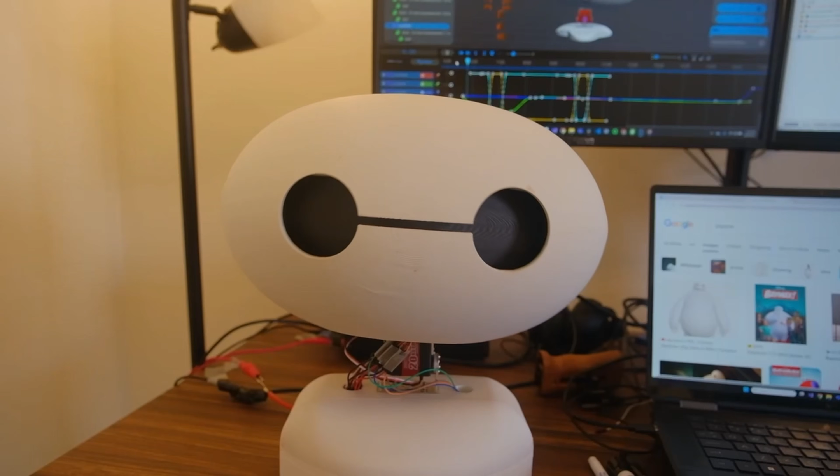Hello, I am Baymax, your personal healthcare companion. I was alerted to the need for medical attention when you said, ow.

Pretty cool, right? And this thing can already do so much more, which I'll talk about here in this first video. And my final goal for this project is to have a robot that can fully walk around and talk to people. And most importantly, give out some sick fist bumps. Ba-la-la-la. But first, let's start talking about how to actually build this thing.

There are three main parts to Baymax: the physical robot itself, the control animation to move the motors around, and the software, which basically acts as his brain. It takes all of that working together to bring Baymax to life. The really interesting and unique stuff for this robot is later in the animation and software sections. I'm saving those sections for the end because it turns out that they're kind of actually really hard to do.

Hello, I am Baymax, your personal healthcare companion.

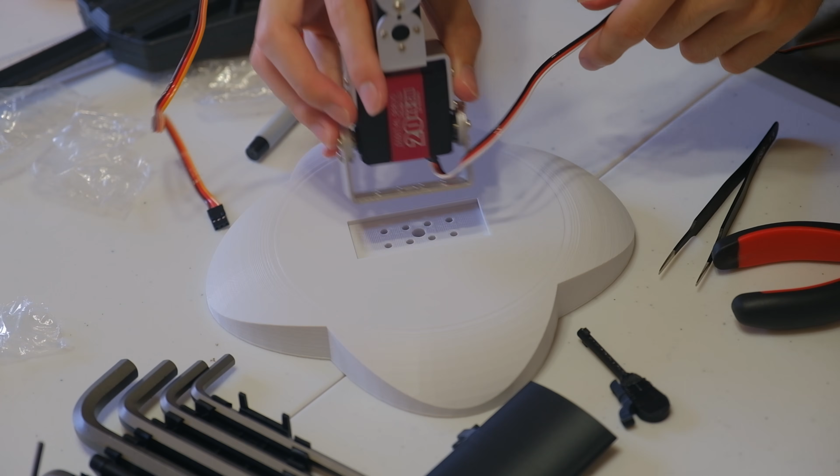I'm going to be starting with the physical robot first, because in robotics, your hardware is the foundation for everything that comes later. If I don't nail this step, everything later will always look wrong. For example, if we look inside the head at Baymax's neck, this motor moves his head in this direction. If I move that motor up even a few inches, Baymax goes from "aw, cute" to, well, you can see it. And this is the first real challenge of this project, to make my robot head match the real Baymax.

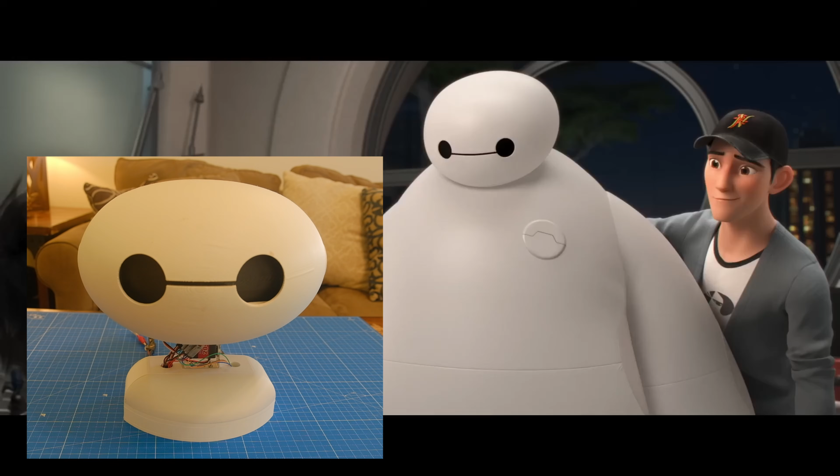And to make sure I got it right, I did a ton of research on how Baymax's head moves and then copied that. The end result was this neck that can move in all three rotational axes. This movement can also be combined to make more fluid looking animations. Combining a lot of different movements like this is usually where animatronics start to come to life.

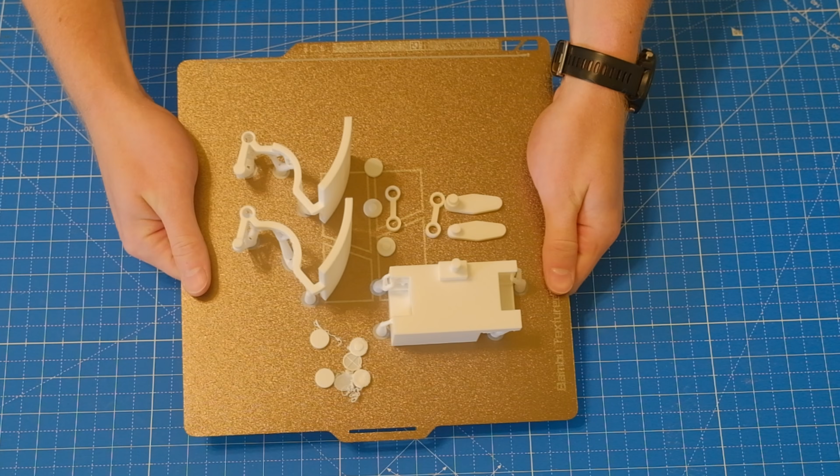After I finished his neck, Baymax had another glaring issue: his staring problem. Before I added his eyelids, when he was moving around and talking, you were just staring into his black, soulless eyes. So I needed to give Baymax the ability to blink in order to make him realistic, because the real Baymax blinks a lot. So to do this, I designed this 3D printed mechanical linkage that lets two motors control two eyelids. I assembled two of these together and then mounted them inside of the Baymax head, so I can use them to make Baymax blink.

And because every eyelid is individually controllable, I can do some more fun things, like give him certain emotions while he's talking. This little feature is making Baymax look so much better already.

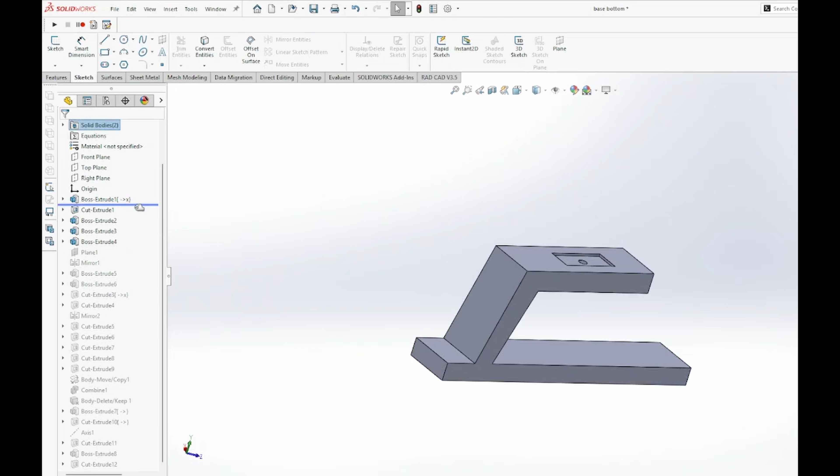The last thing I did to Baymax was fix a major issue he had. In my first version, I was kind of an idiot, and the head weighed way more than the base. So he kind of just flopped around like a fish and didn't really move correctly. To fix this, I had to design a new base for Baymax to sit on. Luckily, it was a very easy and simple fix. I designed this slot for a weight and put 5 pounds inside of it, and the whole issue was fixed.

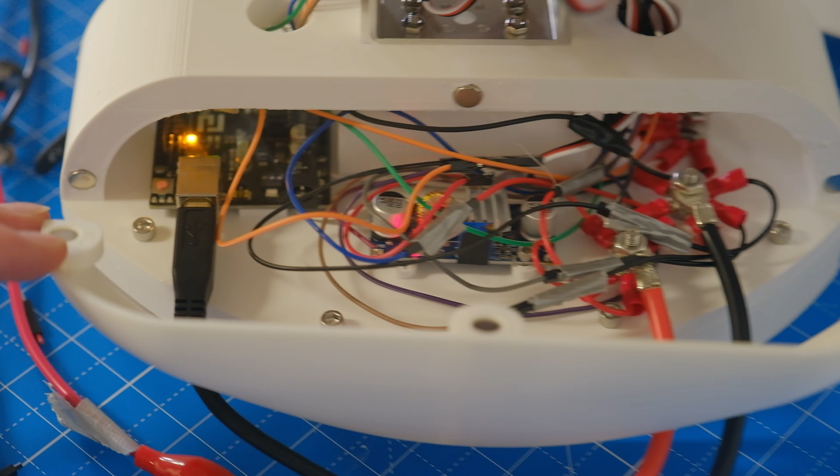Hey. And as a bonus, I was able to hide the electrical spaghetti from the first version behind these really sick magnetic panels. And now finally the head was done, and the end result is pretty dang cool.

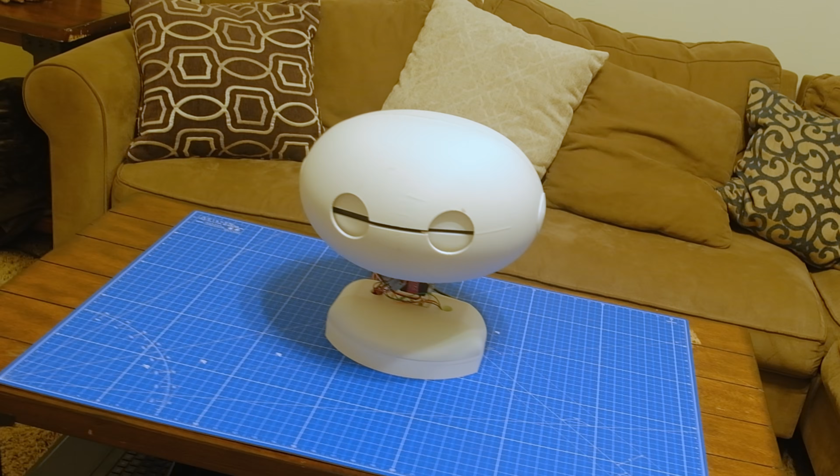So the next thing I wanted to talk about was the animation software. This is what controls all the motors and makes them move in a way that looks good. It's been working behind the scenes in all the previous shots of Baymax, but I want to talk about it more directly now. The animation software I've been using for this is very similar to what Disney Imagineering uses for their animatronics at all their parks.

You can set a bunch of different set points for where the motors should be at different times, and the software will fill in the gaps between those for how to move the robotic motors. I have 7 different channels in my software for each of the 7 motors.

Specifically for this Baymax project, I am creating a bunch of preset animations that can be run later. These are basically just options the AI can choose to make Baymax move in a certain way. Each option acts as like a button it can push to make the head start to move. So for example, I can make an animation like shake head no, and then the software later can play that animation when it thinks the emotion should be like a negative response.

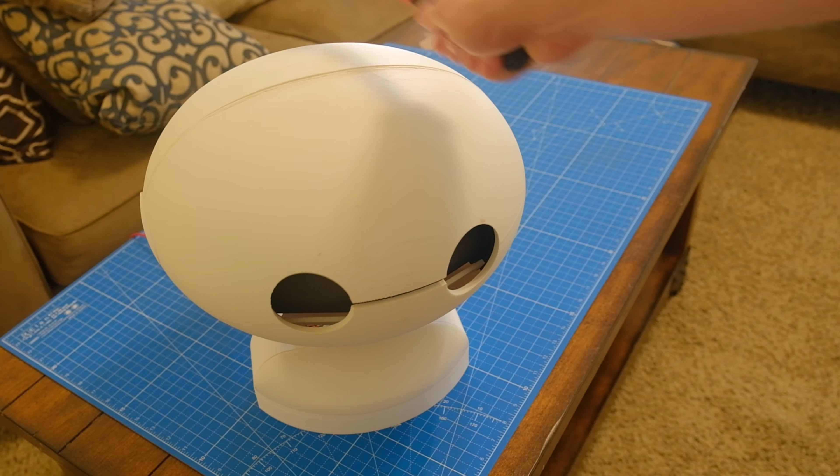And while I was testing this, many mistakes were definitely made. It's a good thing I made his noggin as durable as possible, or else I might be slamming my head into the desk as well. But after wasting a few days of my life on creating Baymax animations, he now has the ability to perform tons of different movements. But there is still one huge problem in Baymax. He has no backend code and therefore he has no brain. So we need to figure out how to fix that next.

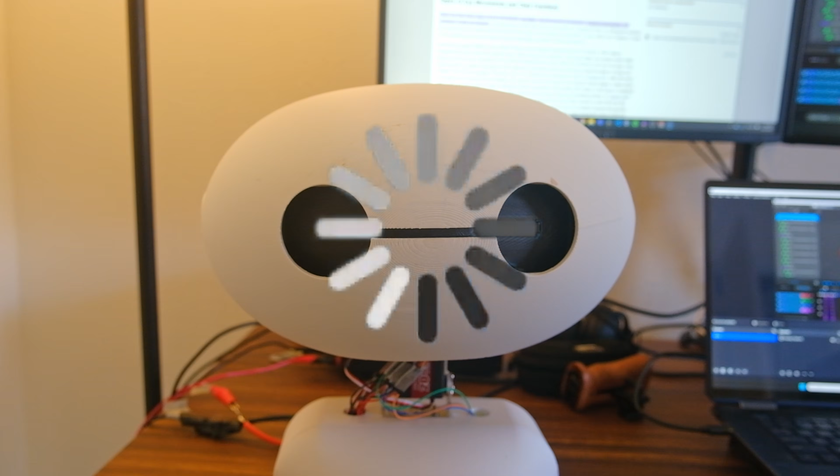To create Baymax's brain, I'm going to take 3 different neural networks and combine them together. You can see in my incredibly nerdy software flow diagram what those 3 different neural nets are for: speech to text, text analysis, and text to speech. This process takes comically long, so while Baymax is processing, I have different parallel computing threads controlling some waiting animations.

This process is actually kind of complicated, and I could talk about it for a while, but I think the best way to actually see what's going on is to show you a conversation I had with Baymax, and then show you where his brain is at with the flow diagram, so you can see it all together. So, here that is.

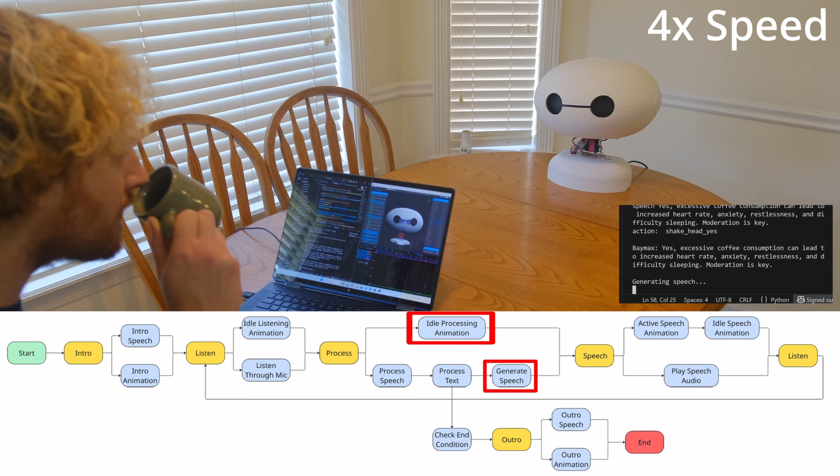Hello, I am Baymax, your personal healthcare companion. How may I assist you today? Hey Baymax, is it possible to drink too much coffee? Yes, excessive coffee consumption can lead to increased heart rate, anxiety, restlessness, and difficulty sleeping. Moderation is key. Good to know. Do you think I should stop drinking 28 cups of coffee a day? Yes, reducing your intake is advisable for better health. Aim to drink no more than 3 to 5 cups per day, if possible.

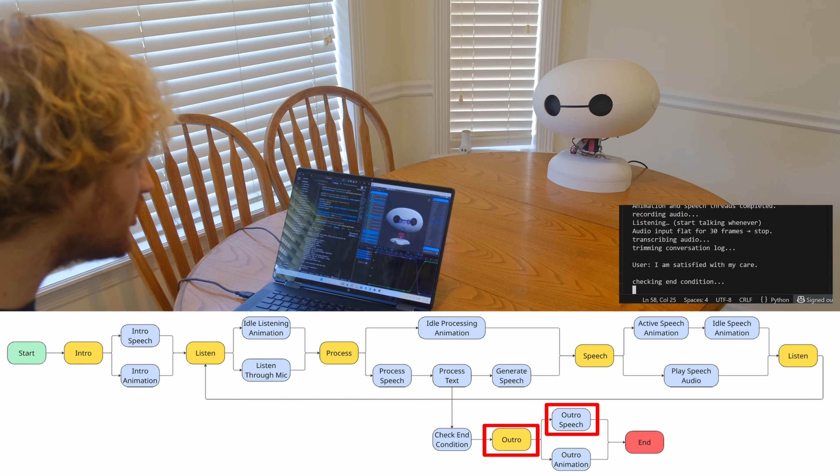Alright, thanks for your help, Baymax. I cannot deactivate until you say you are satisfied with your care. I am satisfied with my care. I am glad that I could help. Goodbye. Let's go!